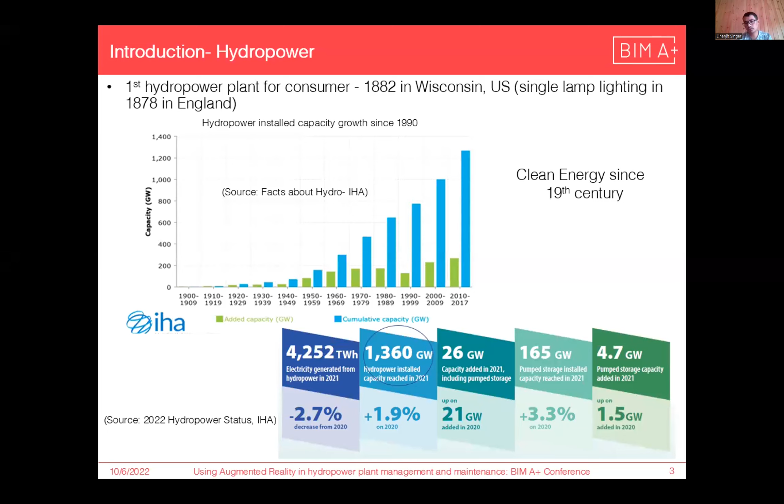And since the energy supply from other sources like solar and wind fluctuates with everyday weather patterns, whenever there is a deficiency in energy supply, hydropower can quickly start from 0 to 100% to stabilize the electricity grid. Moreover, it has the potential to store energy by storing water in reservoirs and pumped storage, where we use the water to generate electricity during peak, high demand.

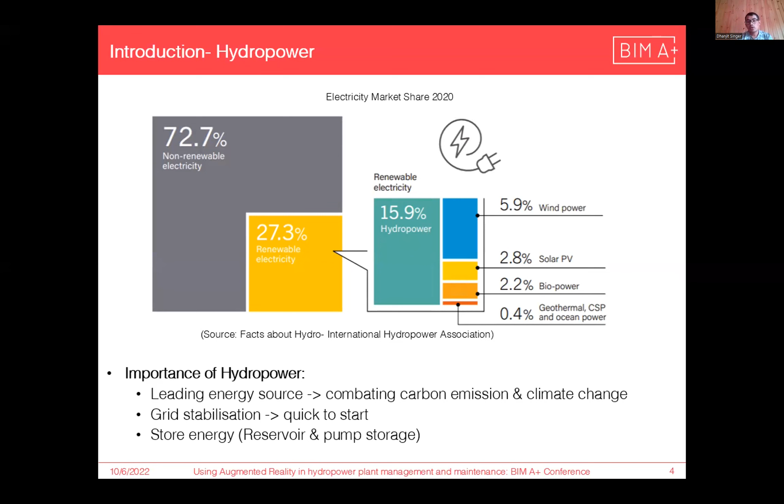Since hydropower plants have been here for a long time, almost 50% of the power plants will need to be upgraded and modernized by 2030 as per the study by Agostini and the team. This poses various challenges: operation costs have increased, and there is pressure from stakeholders to quickly fix issues and reduce revenue loss.

These power plants are resource intensive, whereas on the other side, the available manpower is aging, there is a shortage of skills in the market, and the cost of energy from other sources is coming down, whereas because of the aging of the power plants, the cost of energy is going up. So there is competition from other energy sources to manage the hydropower plant.

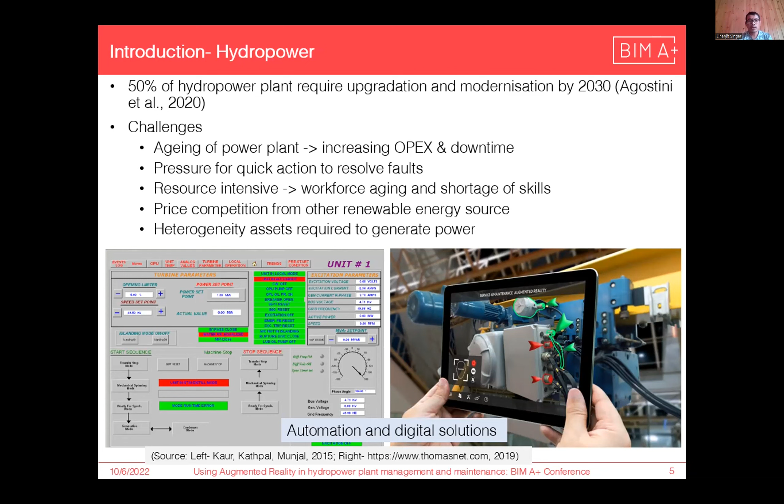Therefore, automation of the power plant and using digital solutions such as augmented reality to assist operators in the field is the way forward to address these challenges. Hydropower plants use various strategies with the ultimate goal to minimize machine shutdown and revenue loss. Therefore, I did research on how to use augmented reality for the effective management and maintenance of the power plant.

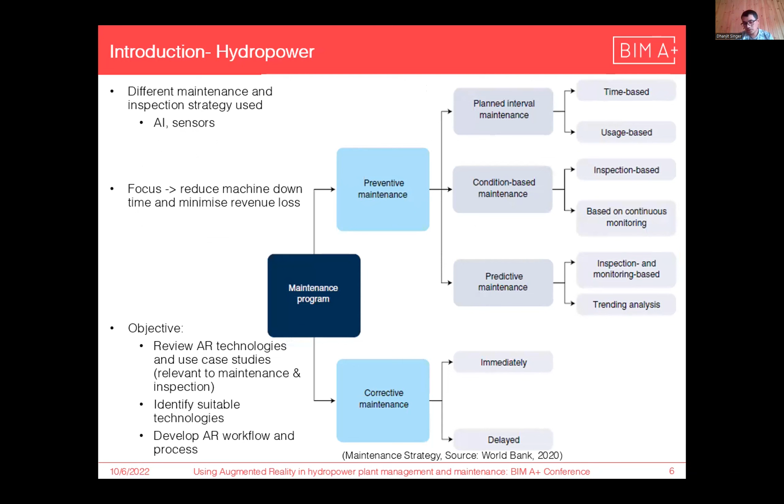Augmented reality enhances the real physical environment using virtual information for better perception and experience. The virtual information may be graphics or images, 2D or 3D models, and some textual information, for a better understanding of the environment.

Augmented reality works by capturing the scene in front of the user with the help of a camera and other sensors, and the AR software compares the information captured from the scene with its database, and then the relevant information pops up on the screen in real time, so that the user can understand the situation or the task to be performed in a better manner.

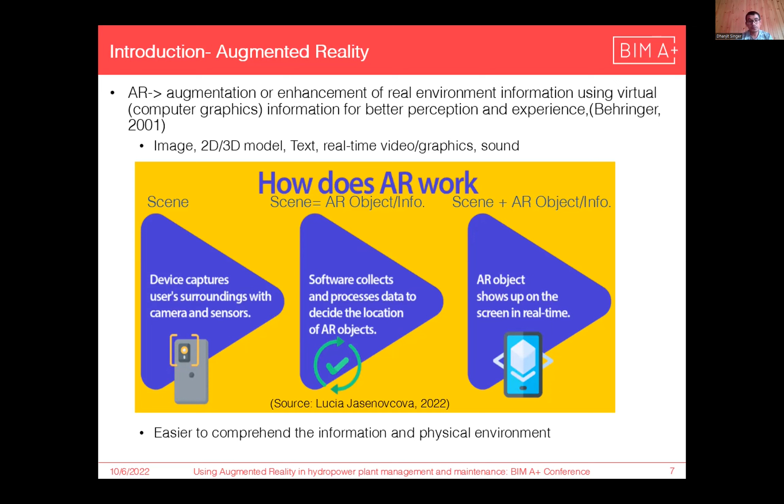So this is my methodology for the research. Since I have been working in the hydropower sector, I selected to do research on using AR in hydropower, and then I did a literature review on technologies and methods in other sectors that can be used for hydropower plant maintenance and inspection.

Then I developed some questionnaires and planned a hydropower site visit in Slovenia, but I could not visit because of various issues. Nevertheless, it didn't affect my research, so I continued even without visiting the power plant.

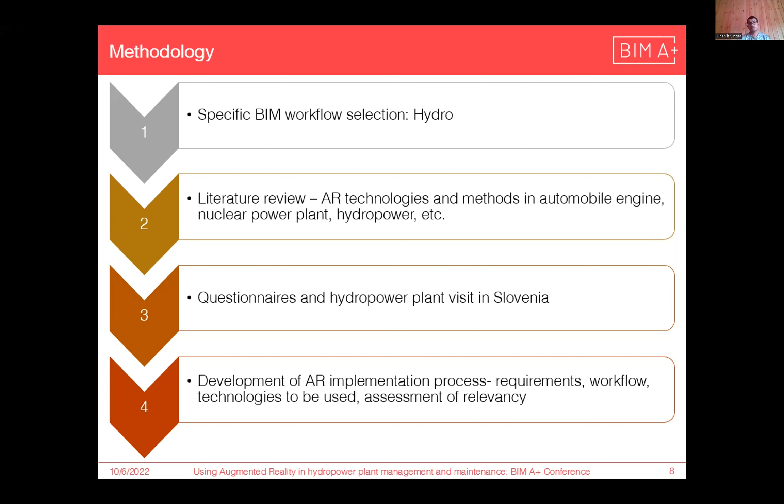And then I developed the AR implementation process. So to start with, the use of technology differs with the type of project and type of information available for any projects that we are going to use the AR for. Like, if we have a project that was developed on a BIM platform, then we could use BIM augmented reality, where the AR software recognizes or identifies the real object by comparing it with the model that it has as a database.

Or if we don't have the 3D model, then we can use the other solution with the help of AR markers like QR codes and barcodes to identify the type of object. Then the AR software displays the relevant information that is required for the user to understand the tasks to be performed. And in most of the existing cases we don't have it, so we need to develop a 3D scan and develop a 3D model from the available 2D drawings and other graphical information.

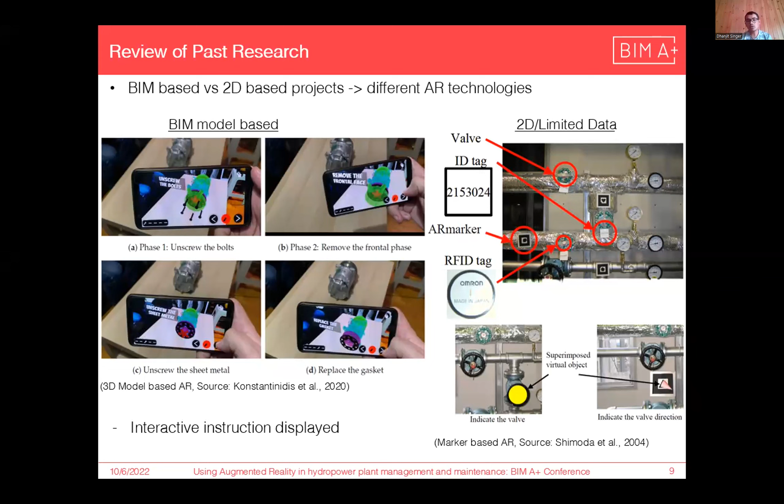And there is another feature of using photographs of the objects, a number of AR markers or QR codes fixed at site, and we can use other sensors in the device like gyroscopes for better performance. And there is another feature of trackers to be fixed, site preparation to be done at site.

And this is where the questionnaire was shared with the power plant manager. Since I have been working in the power plant, I wanted to compare how different or how similar it is, so that it helps me to develop my dissertation.

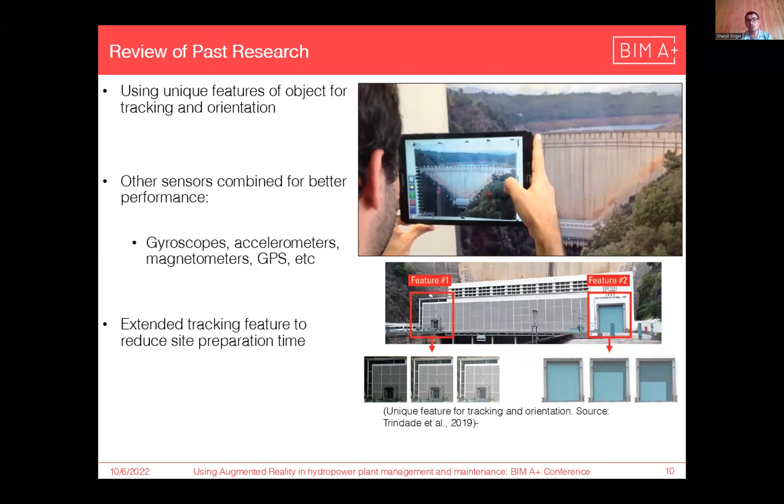And for this process, the handheld device, the existing mobile device that we have, is found suitable because it is inexpensive, we own the device, and it has sufficient processing. Depending on the size of the database, we would need cloud storage. Else, if it's a small component, then we can store it in the device itself.

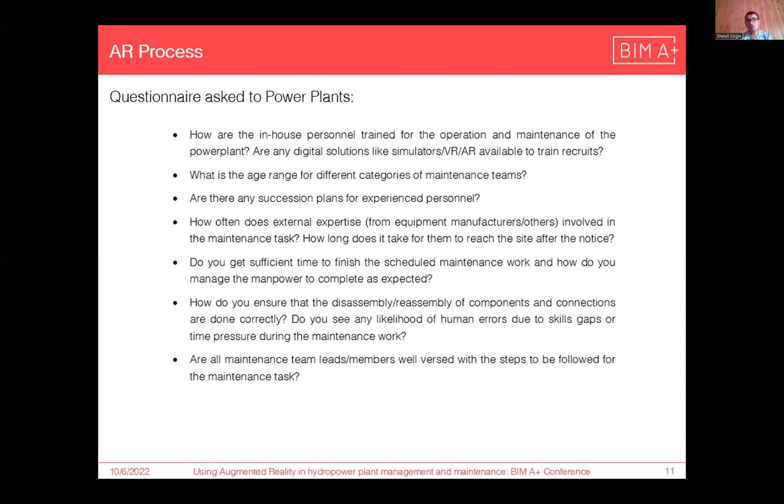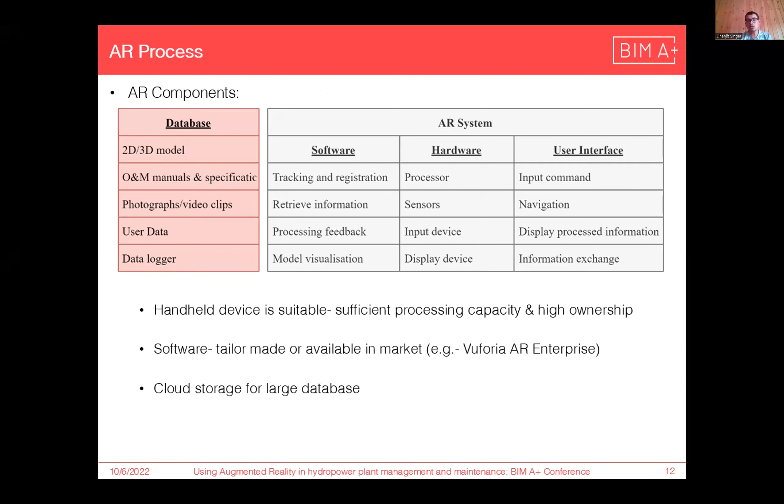This is for the implementation of the AR, where, as I said earlier, we can 3D model the existing infrastructure, but it will take a lot of time and cost. Or we can use AR markers, QR codes, fixed at site. And then we need to digitize the information for maintenance and inspection. We have to digitize that information to be incorporated in the AR software.

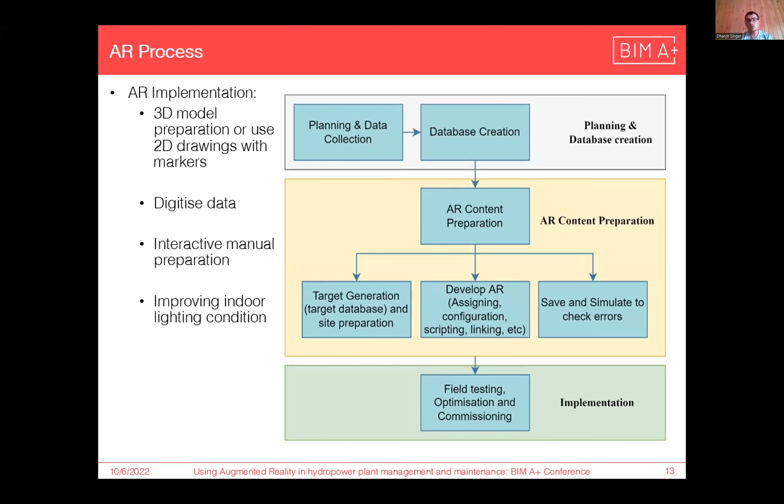And then since most of the power plant components are usually indoor, we need to improve the lighting condition, else the identification of the object by the software will be poor. And this is the flowchart of AR on how it will work for the particular maintenance or inspection tasks.

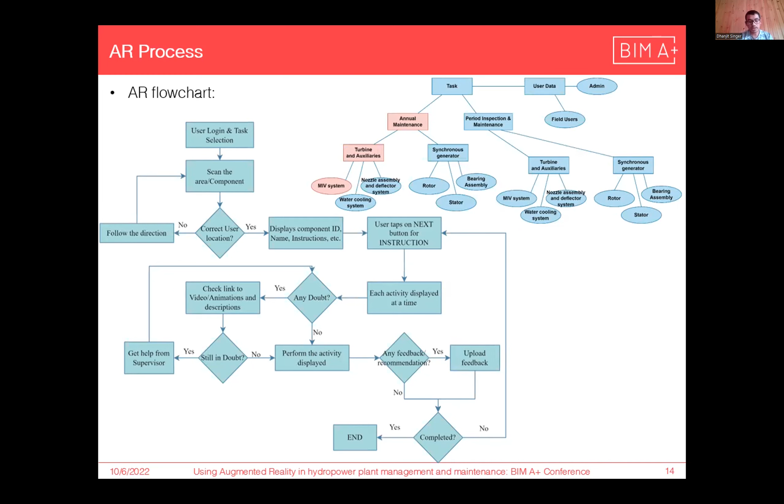And to summarize, AR can be used for training new people. We are facing a lot of manpower shortage, so this can be used for the training of human resources. And we can use AR to assist the operators and optimize the people working at the site, and experts from one power plant can assist the people working in another power plant through remote collaboration. And anyone who has access to the AR system can keep track of the condition of the power plant in real time.

Of course, there are challenges in reluctance to accept the change, and the availability of information will impact the implementation, because most of these power plants don't have the model or the relevant required information, and the cost would vary with the extent of information available, and of course the site preparation.

And with AR, the operators can have all the maintenance and inspection instructions readily available in a structured manner, with which they can take faster decisions, because AR can present them with the physical environment for better visualization, and accordingly their productivity will improve. And of course it would help to a certain extent to address the skill shortage that is happening across the hydropower sector. And that's all from my side.